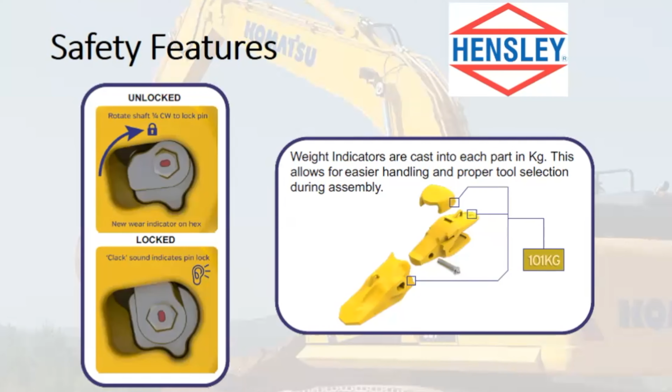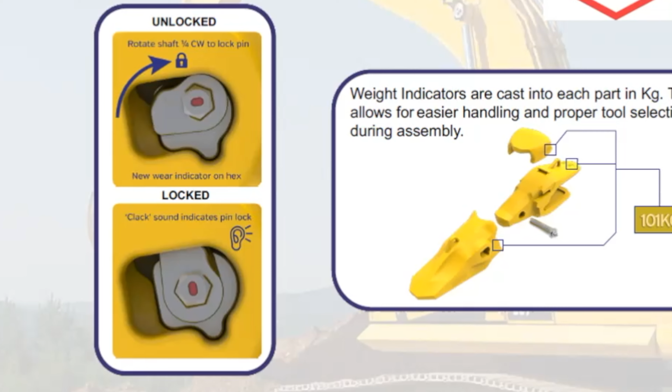Okay, let's talk about a few of the safety features that Hensley has implemented in the new KPrime system. One of the things is the keeper itself is hammerless. You're able to slide it in and turn it a quarter turn and it locks. With the new system, when you turn it a quarter turn, you get an audible click that allows you to hear that it's locked and it's in place like it's supposed to be.

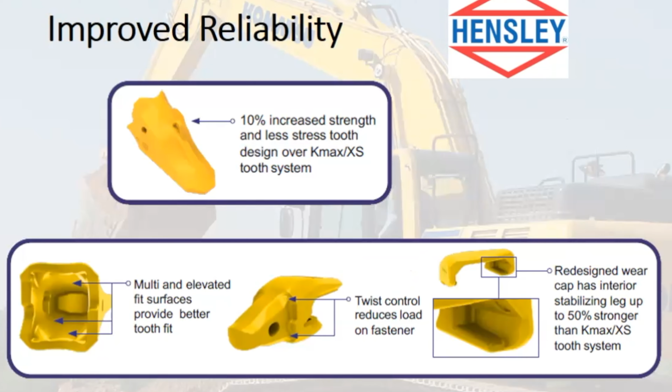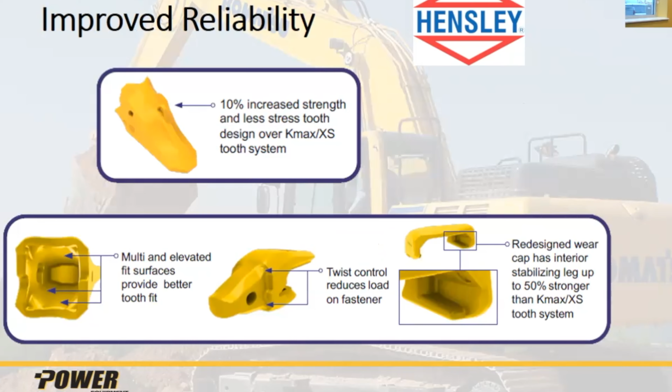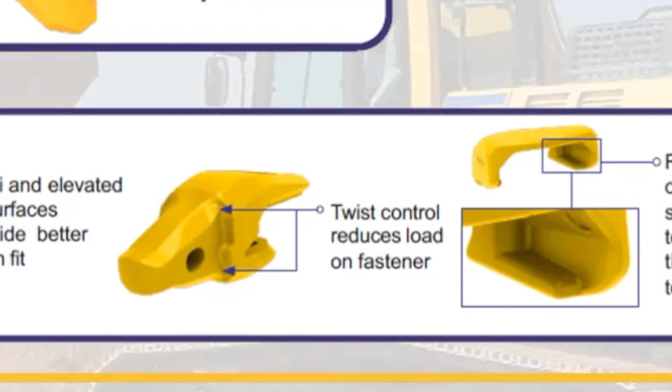They've improved the reliability. The 10% increase in strength creates less stress on the tooth and design over the KMax system with the new KPrime system. The twist control is one of the other things that they've integrated into this. There's a natural pull on the tooth when you're digging for it to pull to the right or left. The new twist control keeps it from being able to twist and shear the shank off.

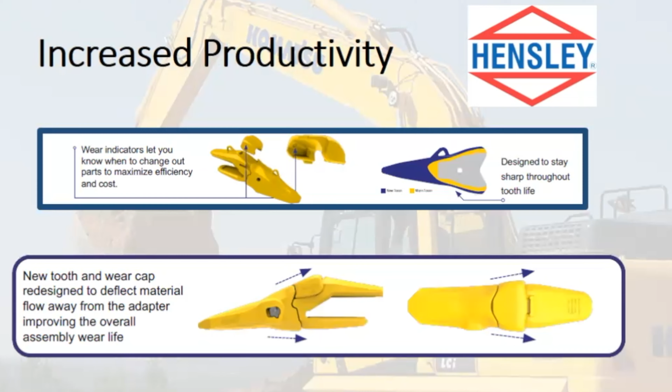They've increased the productivity of the tooth. They've sharpened the tooth a little bit. The tooth is designed, as you dig, to continue to sharpen from start to finish. On some machines, the teeth are interchangeable. If it's wearing a little funny, you can turn the tooth over and it'll still fit, which is different than with the KMax system. You couldn't turn a tooth over before.

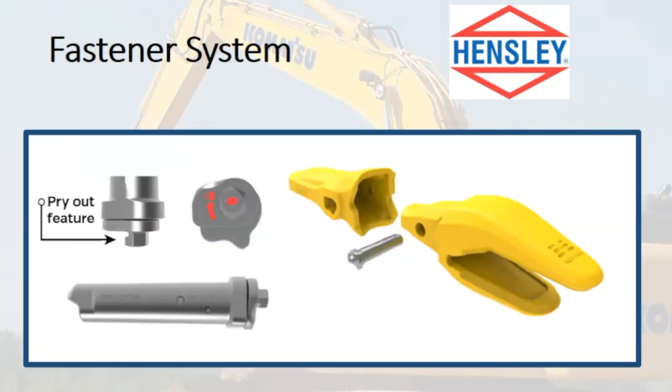But also, one of the greater things about the Hensley system has always been the fastener system. There's no rubber involved. So when you're digging in rock and it creates heat, it doesn't make the rubber pliable where the keeper can fall out. Also, if you're burning brush, it doesn't burn the rubber out of it, where you lose the keeper and then your tooth falls off.

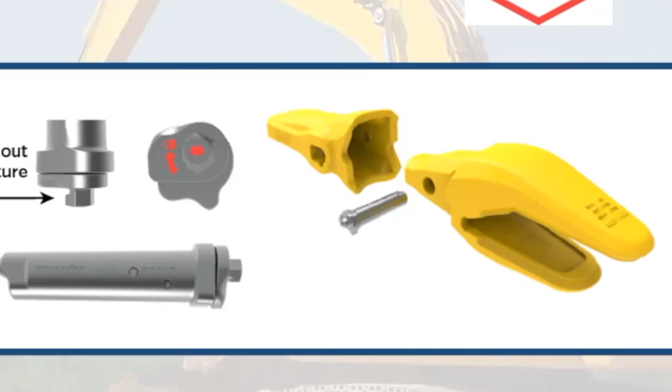If you wear teeth out, you take the keeper out of it, quarter turn. It's got the pry spot. You're able to take a screwdriver or pry bar and help pry that out so you don't have a hammer involved, which is safety for your hands. Once you remove the keeper, you're able to put a new tooth on it and replace the keeper, and you're back to work. We also have several options in teeth.

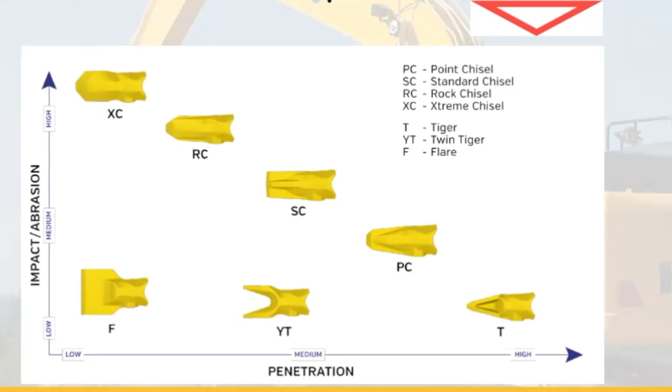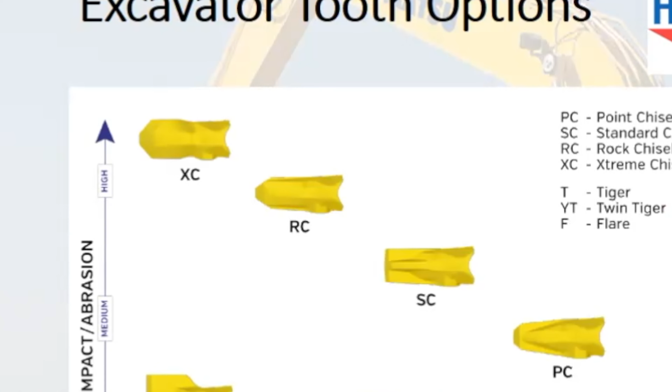It starts out with most general construction. You use the SC style tooth. You're able to dig in just general dirt and rock. As you get into more abrasive or all rock applications, or in quartz or something that's extremely abrasive, sand and different things, you can move up to an XC style tooth. The tooth is thicker. You lose in penetration, but you gain in wear over time.

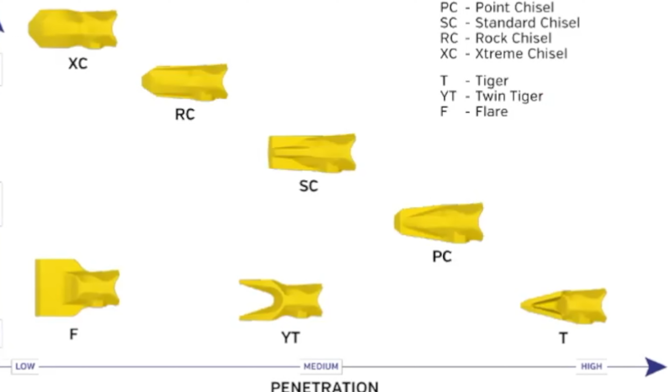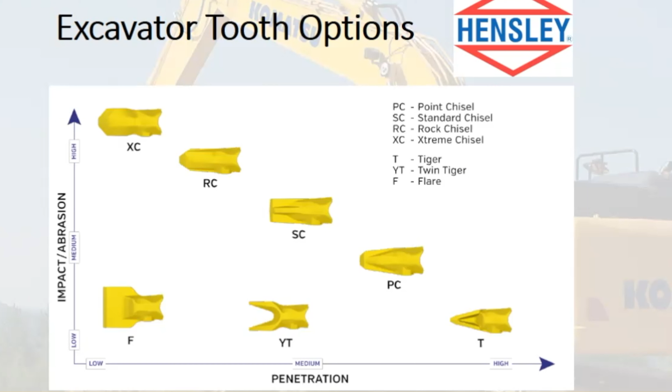Also, if you're in real tight material, you can go down to like a tiger tooth or the twin tiger that you can use when you've got tight rock or somewhere where it's tough penetration. They also have a flare style tooth for sand or muddy conditions to help with cleanup, so you've got a wider tooth with less space in between your teeth. So there's several options depending on what you need. See your local representative, CSR, and they'll help you figure out what's best.

And Hensley has a conversion program where you can take any other manufacturer and convert to the Hensley KPrime system, and you get shanks for free, and then you buy the teeth and keepers. Now, if you've got a bucket that's already worn out, and it happens to be a Hensley bucket, you can also swap the old KMax system for the new KPrime system at a discounted rate.